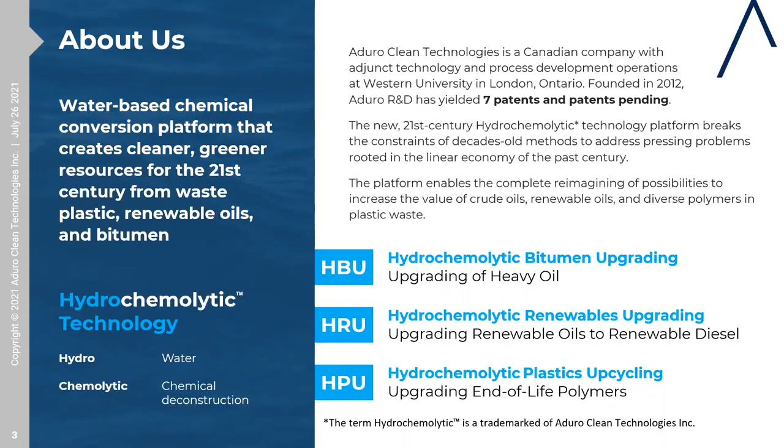This uses high heat; the use of high heat limits recycling and upgrading options. Think scissors selectively cutting chemical bonds versus a hammer smashing those chemical bonds. Both work, however with the scissors you can choose your outcome. This is the breakthrough in hydrochemolytic. Next slide, please.

So a little about our story. As you can see, we've been very active over the last 10 years in advancing our technology.

We took the initial bitumen research to Western University and advanced it through a series of experiments, initially to perfect bitumen upgrading aspects of the technology, then looked at the possibility of using other feedstocks as ingredients in our process. Through that research, we developed pathways for renewable diesel and biojet type fuels. This led us to submit patent applications on renewable and vegetable oil-based fuels.

In 2018, we again sought to change to a different feedstock. This included rubber tires, plastics, and polymers. Our success here demonstrated that we had developed a comprehensive chemical conversion platform with potential for very broad applications.

In 2020, we took our research out of the lab and are now in the pilot stage. We've moved our operations to the Sarnia Lambton Research Facility and are setting up our R2 unit. This is our first milestone that you guys have been hearing us talk about. This is a continuous flow process unit that we are going to demonstrate bitumen upgrading on.

This represents a decade's worth of work, nearly $4.5 million worth of both equity, time spent, and friends and family rounds of funding, and indeed, as you can see, many grant applications through NSERC, OCI, BiofuelNet, and collaborations with Western, Greenfield, and more recently the Western Sarnia Research Facility with BIC, the Bioindustrial Innovation Canada.

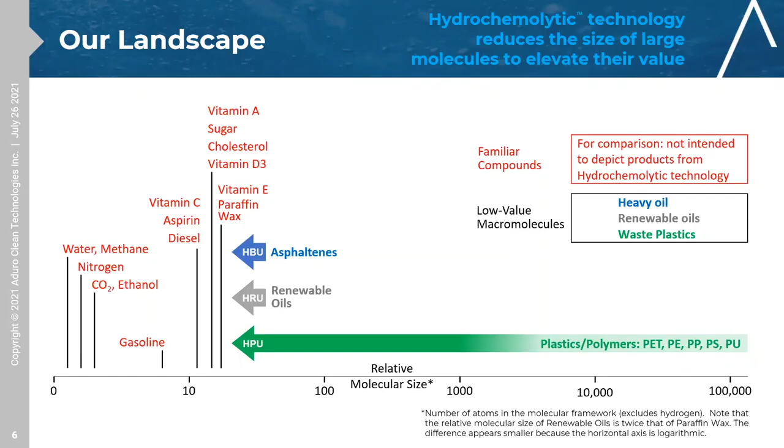So what's the challenge? Over the years, there were maybe three approaches or concepts to solve those problems. Of course, we're coming from what we call the linear economy, where things were available in vast quantities, and we simply use them and dump them. For many years we did the minimum — just landfill, or reuse plastic by blending, sometimes with some mechanical breakdown — trying our best not to add cost and just doing whatever we can after using it to solve the problem.

In today's time, society has much less stomach to deal with it, and is really looking for solutions to reduce the size and footprint of landfill. In addition, we today tend to see those landfills as assets — there's a vast amount of hydrocarbons there that we could use. The question is how we can use them.

The second approach, which is more common — we're talking about conceptual approaches — is the heat-based approach that Abe mentioned. It's divided and cross-associated with each of the sectors: the heavy oil, the plastics, and the renewable. Each one has a heat-based operation. For this discussion we minimize it to plastic, which is the simplest to show, but all the others use more or less the same approach.

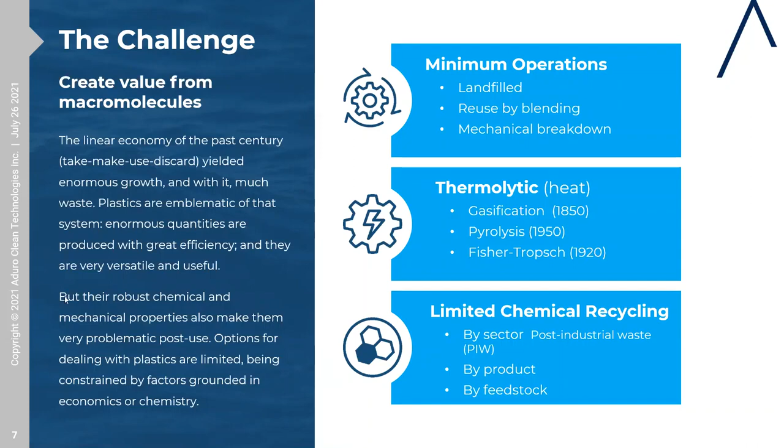So again, this is on a broad scale, items that are associated with certain realities coming from the bitumen, the plastics, and the renewable. Often what you will see, because of the issues I discussed before, the efforts to process and deal with what we call macromolecules on a large scale, and because you have to suck every cent out of it, you end up with high capital cost.

Normally, you're bound to do some large-scale operations. You do have to deal with byproducts. You have a high energy intensity, and when you have high energy intensity, things happen. You simply, I'll call it burning, although it's not burning. It's just hitting it to such an extent that you have to crack everything, and obviously you have to deal with the emission of it. Those are all.

If there is a technology that could reduce all of that, then you can see the power of the opportunities, of course, because of that. And the petrochemical refining was relying on those activities for many years.

I'll just remind everyone that we are at an early stage. We're young in this case, but we are converting in a way that performs maybe a chemical conversion. And for that reason, we are reducing significantly all the above components. Hopefully we can show it to you as we move forward. Next slide.

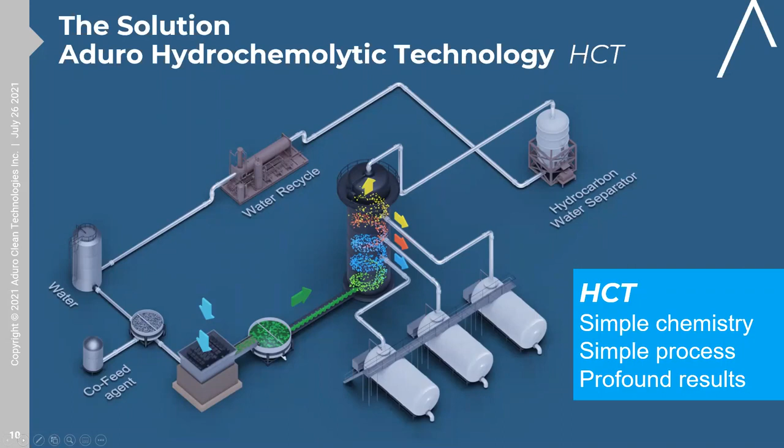As I mentioned, the benefits we're talking about are embedded not in the design, but in the chemistry that we have. Some of them are mentioned here, like financial elasticity. Basically, we're talking about a system whose starting costs are much lower than the equivalent nearby system — we're talking about around 1 to 10 in size.

That gives you an advantage to move around and place the processing unit in areas that are not ideal for a vast, large-scale operation. It also gives you the opportunity, if the market changes, to idle your system or increase capacity as you see fit. There's a lot of capital cost saving associated with the process itself.

There's much more capability to deal with today's scenarios, which, as we've seen in the last two years, can be really sharp in reaction. The system is much smaller, as I mentioned — about 10 to 1 in size compared to the nearby process.

It's much cheaper. Based on the heavy oil industry, cost is measured by how much money you would invest to upgrade a barrel. An upgrader of 100,000 barrels per day or so will cost about $10 billion — so $100,000 per barrel in that sense. We're talking about an investment of over $10,000 per barrel, just by comparison. If we're wrong, it might be $15,000 per barrel, but it will never be as high as $80,000 to $100,000 per barrel.

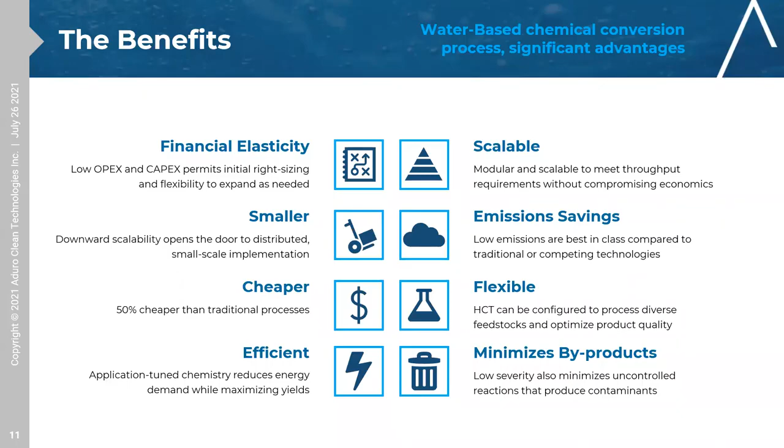So how much pre-sorting of the plastic feedstock is required? Can you take all the plastics, most of the plastics, some of them, or do they need to be separated?

Yeah, this is a great question. Everyone cares about plastic, and plastic is close to us. It's everywhere, all around us, and when we look at it, we know there should be another way to deal with it apart from just burying it or burning it. This is a learning experience, so understand that the technology is fairly new, and there are things that are straightforward for us because we've already had huge success.

By way of example, polyethylene. And we know, because of the chemical nature of polystyrene and polypropylene, that we anticipate somewhat of the same profound success. When you're talking about a mixture of plastics, for a minute let's take out PVC.

Let's assume for a minute we have a PVC magnet, because PVC creates all kinds of issues. When we think of the process chemically, we do see the opportunity to produce, to operate on a mixture of plastics in the same way that I explained.

In other words, in our work, we're subjecting each compartment in the reactor to reactions that we feel will only operate on the designated material. So overall, we can imagine operating on a mixture of plastics.

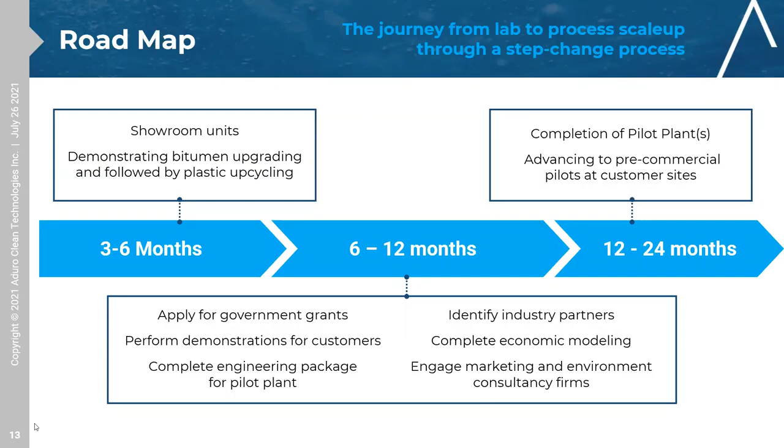Thank you. Do any of the competitors, public or private, also use a licensing model? That's a great question. So most of just think of it for a minute from the profound change that the technology could represent.

If most of the technologies we're talking about are somewhat pyrolytic or heat-based, then it implies a certain way of operating. What you need to do is work on vast volume, vast amounts of quantities, and the technology - I'm not saying it's not efficient - all hands down, you have to respect other operations. It's just limited by some chemical and economical realities coming to us today because of society and other issues.

But you would see how they need to lock themselves into some kind of offtake agreement and build massive projects in order to extract the economic value. By contrast, this technology enables a lot of flexibility - in other words, to provide solutions dedicated to a territory or to a customer. And the customer could be a small customer, and we could maybe serve two or three customers at once.

And for that reason, for now, we're not aware of it in the plastic area. In the heavy oil area, we think there'll be different models, but in the renewable areas, they're not competitive, but there are technologies that are offered for licensing. There are different types of processing to produce ethanol, by way of example, and some of them are licensed - just technologies that are licensed, but not directly, not right now, not directly.

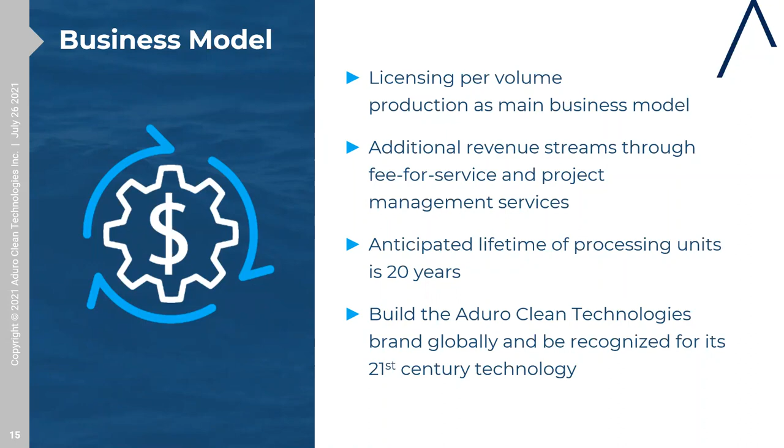We see growing interest from smaller size producers in this plastic space, and the reason is that some of them want to move away from the pyrolytic process. If you're looking into options to create some kind of circularity, then you absolutely have to look into chemical conversions. Everything else just doesn't give you the credit, so we have growing interest from organizations interested in that type of circularity, and we're investigating that path.

The petrochemical, the heavy oil market in Alberta is more about proving to us that this works. They've got scars on their back from many years of efforts, so there's much more skepticism. At this point in time, we have to demonstrate the pilot before moving into further discussion. Those organizations have put so much money over the last, I'll say, 50 years into the ground building capex, that if you're coming with something, you better come in with all of the answers. They're waiting to see what we do.

Perfect. As far as the plastic recycling process, have you done any testing yet for the bromines and the various flame retardants contained within plastic products? Have you done any testing for that so far, or no?

Right now, we're looking at the families of plastics, and each family breaks down differently. But overall, from what we see, based on the families we recognize, we've done work on polyethylene. We're now doing work on polypropylene, and polystyrene is next. So it's growing know-how, but the chemistry checks out, and we know what to do with it. We anticipate some issues, and we already anticipate some modeling.

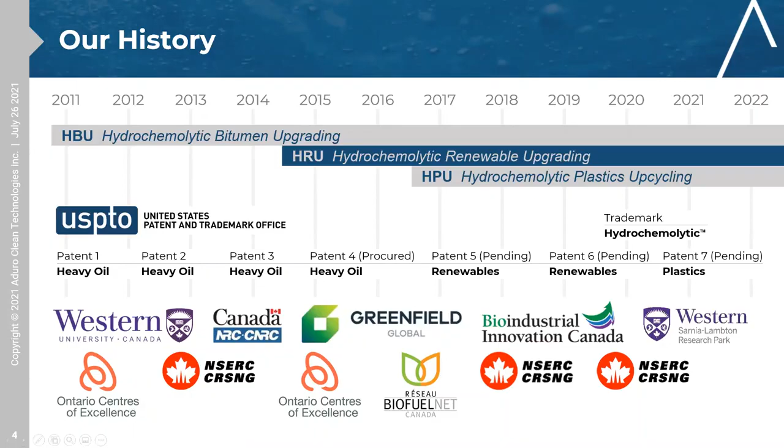I feel quite strong that the team we've built knows how to deal with a variety of issues associated not just with plastic, but with bitumen. I feel we understand it quite well at this point, to our spec. We don't try to dive into other technologies, but to our level. I think there's a lot of know-how there that will provide optimism that we will know how to provide solutions.

Perfect. As far as financial backers, can you speak to any of your financial backers, both private and public, as far as grants? In terms of financial backers, over the last 10 years, how has the company been funded? And going forward publicly, do you have any strategic finance partners?

For most of the time, we've been living by private investors, family and friends, and grants. I cannot speak highly enough of the government grants that enable guys like us to simply survive and stay off the radar. The equivalent of anything we've done in the last 10 years in the lab, I would think, would reach well over 50 to $100 million in terms of research. That's what this amount has enabled us to do.

About a year ago, we met some really strong bankers who believe in what we're doing. I cannot say enough about those bankers. We're working very closely with them, and so far they meet every need of ours, which gives us the confidence that we could do pretty much whatever we need to do in the near future and be funded until we reach our milestones and beyond. The backers are very loyal.